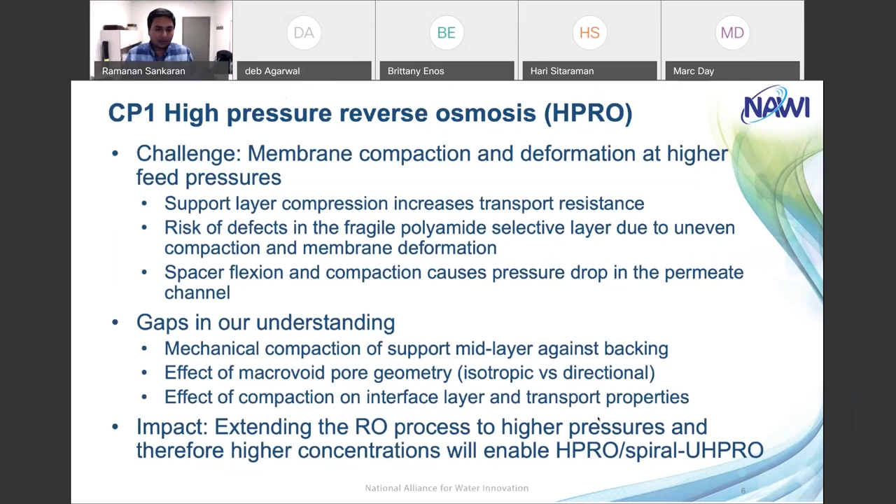Thanks, Ramanan. Let me also acknowledge the team members and contributors to this task, and the challenge problem advisor. For the HPRO challenge problem, the major challenge is to address membrane compaction and deformation at high feed pressures. This can cause the support layer compression and increase transport resistance. It could increase the risk of defect formation due to uneven compaction and may also lead to pressure drop in the permeate channel. The gaps in our understanding are how to model the mechanical compaction of the support layer against the backing, how the macrovoid pore geometry affects membrane properties, and how compaction affects the transport properties of the membrane. Addressing these challenges would enable us to extend RO process capabilities to even higher pressures and higher concentrations.

As part of this task, we developed the following numerical modeling workflow, with two key links. The first is the representation or reconstruction of the pore scale geometries, which could either come from reconstructed experimental images, or could be synthetic or canonical pore geometries.

These geometries can be exported to several physics simulation codes, some of which Ramanan introduced earlier. We can be looking at the compaction to mechanics models or pore scale transport simulations to characterize these membranes. Now, this workflow will enable us to gain more fundamental insights into the performance of the membranes, as well as

develop better informed models that can be used for channel scale CFD and analysis. In today's talk, I'll focus on synthetic pore geometries as well as the pore scale transport simulations. And towards the end, we can come back and talk about the other key links here, depending on the interest.

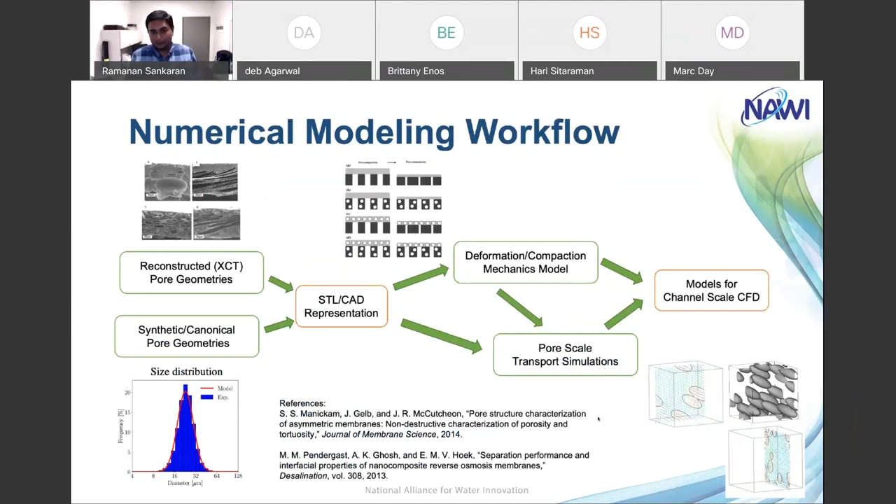So the synthetic geometries are basically statistical representations of the pore scale structures. The Proteus HF workflow synthesizes these geometries that can be easily interactively visualized and compared against experimental images. These geometries are constructed within the code Quilt, and they can be exported in several different formats.

It leverages several open source capabilities as part of this HF workflow. Now, if you look at the first branch, these geometries are pretty lightweight, so they can be very useful for interactive visualization and collaboration with team members, and also for sharing with experimental researchers, so that we can easily and quickly identify some interesting geometrical features of the pore scale, and maybe also iterate on those geometries to construct a

larger database. Now, these geometries are of course also fed to the physics simulation codes, such as the MPM code for compaction and Quilt for transport simulation. And depending on their end use, these files can be larger in size and can leverage the high performance computing platforms.

So let me quickly go through some of the example geometries, parameterized synthetic geometries that can be constructed. Starting from the top left, we are looking at a multi-layer isotropic structure. Basically, this is a structure that has uniform spherical pores randomly distributed within a layer, and then multiple layers being stacked on top of each other.

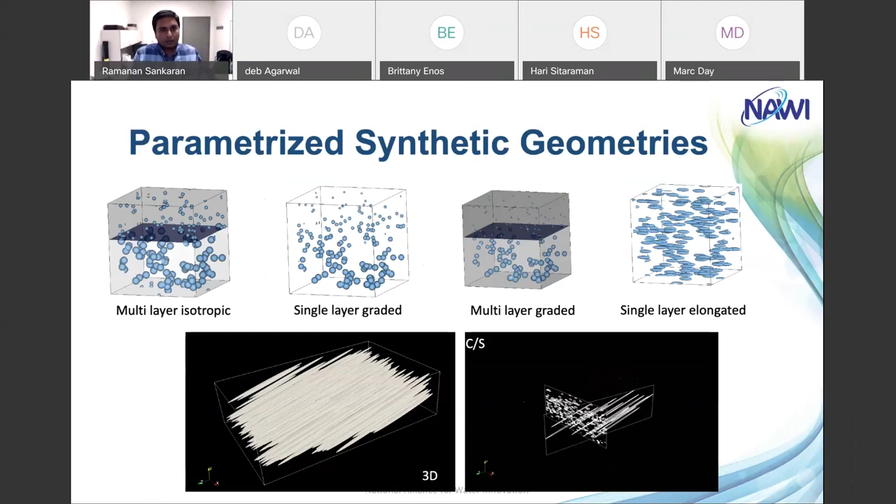So moving on to the transport simulations, these are performed using the code Quilt, which, as Ramanan said, is being developed here at Oak Ridge. It's an interface resolved flow solver. In the recent past, we have looked at several different applications. A couple of them I have highlighted here.

On the left, we are looking at a multi-phase flow application where we studied a molten media reactor that's typically used for converting natural gas into carbon and hydrogen. And that is a really promising route because it does not involve production of CO2.

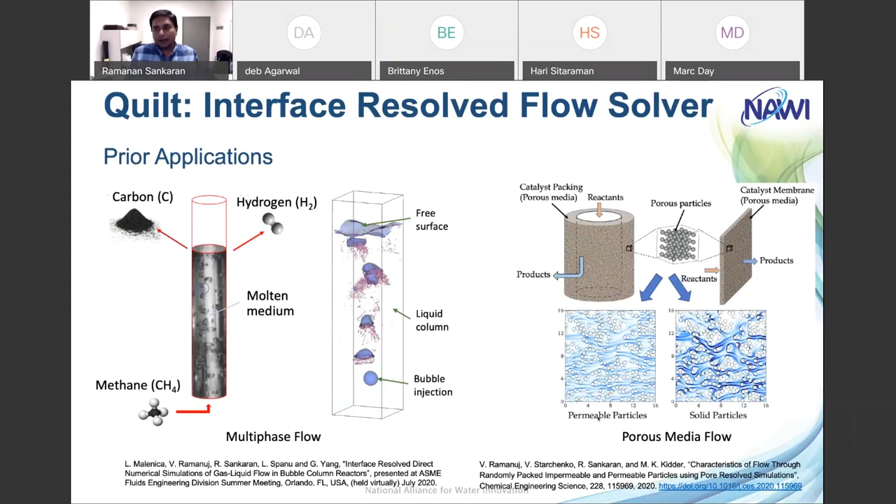On the right-hand side is a porous media application where we studied flow through catalytic porous packings. In this case, we are interested in looking at the effects of polymer particle porosity and how it affects the overall flow and chemical conversion rates in these applications.

At the heart of this code Quilt is what is called an implicit interface representation capability. This is done using a level set method. Just a quick overview of the level set: it is a signed distance function within a domain, and it's used to capture implicit interfaces embedded on structured meshes.

So naturally, following the definition of level set, we can easily understand that the zero level set contour will capture the interface. And being a distance function, it is also used to capture several geometric features like the orientation and curvature of the embedded interfaces.

In the code, we have capabilities to represent dynamic as well as static interfaces. Since this particular problem relates to static membrane structures, I'll skip the introduction about the dynamic interfaces, but I can come back and talk about it later if there is interest.

For this particular application, we chose the level set method specifically for two reasons. The first is that it gives a capability to model the pore deformations resulting from membrane compaction, and that could be from analytical or geometric transformations, or we could impose a deformation field that would result from mechanics calculations, for example, using an MPM code.

If you look at one of the experimental images I showed before, the membrane structures usually have two-scale porosity. They consist of large-size voids, called macrovoids, and the remainder of the membrane domain is made up of

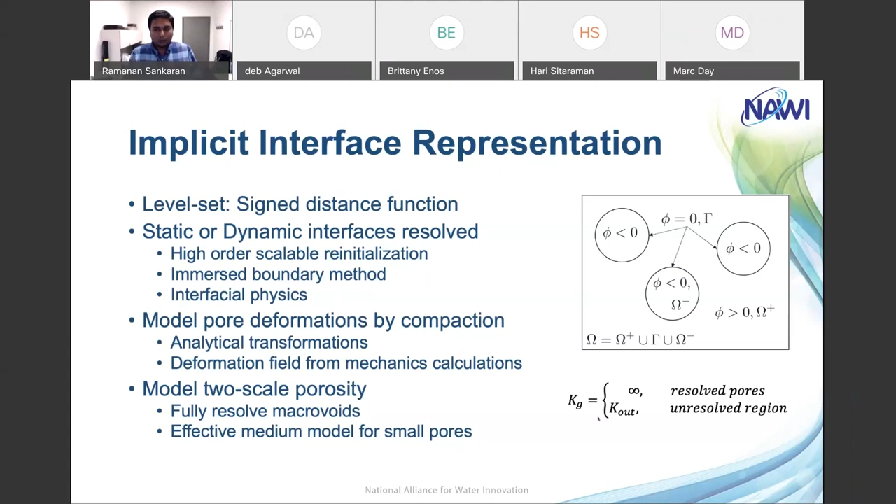homogeneously distributed small pores. So with the level set framework, we can address the two-scale porosity of the membrane by fully resolving the macrovoids using the level set function, and the rest of the domain is represented using an effective medium model to address the transport through smaller pores.

Now, in this case, we are interested in looking at membrane characteristics quantitatively. In particular, we look at the tortuosity, hydraulic tortuosity, permeability, and structure factor of the membrane.

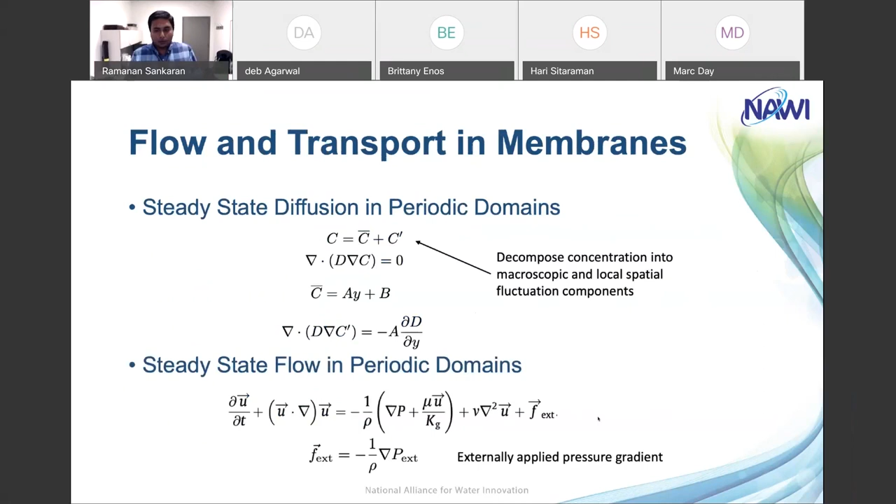To analyze these quantities, we seek a steady state solution for the diffusion and flow transport in periodic domains. The flow in this case is governed by an externally applied pressure gradient.

Now, going back to the synthetic membrane structure I showed before, our aim for this preliminary study was to first identify an experimental work that we can leverage to verify our numerical simulation results, as well as use these results to identify certain key parameters in the geometry or in the physics that we can explore later.

So in the following slides, I'm going to show the calculation of membrane characteristics like tortuosity, hydraulic tortuosity, permeability, and structure factor based on a particular synthetic geometry that we have initialized following some experimental studies.

Here is the work that was published a few years back by Manickam and others. This was actually a multi-layer membrane support structure, and we specifically identified one of the layers to create our synthetic geometry.

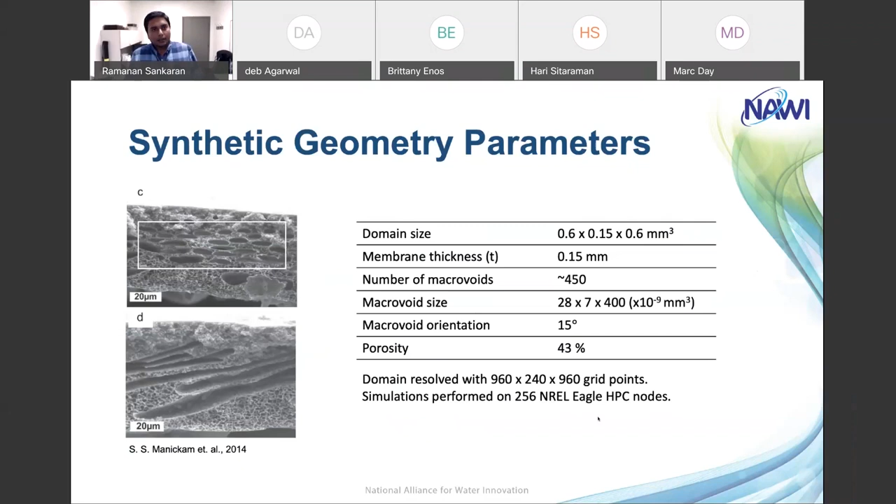So let me come to the diffusion transport first. Here we performed two specific numerical experiments. In the first case, we apply far field Dirichlet boundary conditions above and below the membrane.

Based on the ratio of concentration gradient at the surface of the membrane, we can compute the effective diffusivity of the membrane structure. In the second experiment, we actually solved the steady state diffusion equation on a triply periodic domain,

just like following the equations I showed a couple of slides before. On this right-hand side image, what we are seeing are the flux vectors, which, if you look closely, actually represent tortuous diffusion flow paths that result from the arrangement of these macrovoids.

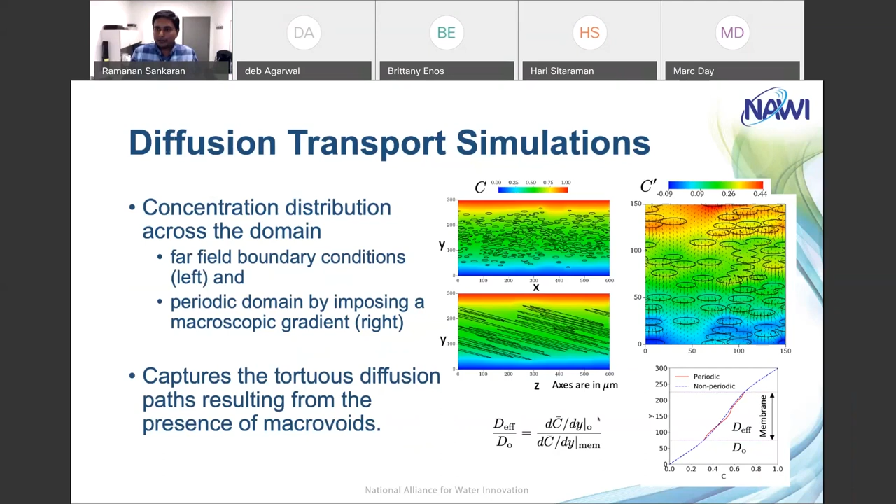Now, to quantitatively represent this effect, we calculate diffusional tortuosity by two different methods.

And in most membrane literature, structure factor is also an important quantity used to characterize the membranes. The structure factor in this case is defined as the ratio of porosity to tortuosity of the membrane.

Now, we compared the numerical simulation results with what was published in the experimental paper I just referred to before. We observed a pretty good agreement between the simulation results and the experimental work.

Although there are a couple of key points to be noted here. The experiments were performed using destructive testing and 3D image analysis, and these were performed for composite membrane structures.

So those were multi-layer support structures, and then those were imaged to obtain the characteristics.

The geometric characteristics, the geometric feature parameters I showed a couple of slides before, correspond to the bottom support layer, which is where these characteristics are computed.

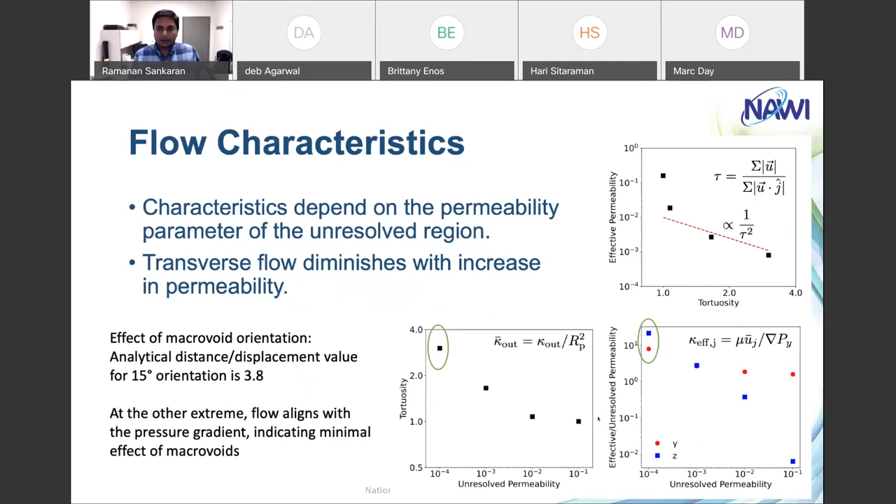And we can further explore the performance of these support layers by creating several iterations of the synthetic geometries.

Motivated by these preliminary results, our next steps include studying the HPRO compaction using synthetic geometries, which can be done in two different ways. We can either impose an analytical or geometric transformation model that will alter the level set function and change the shape of the macrovoids, or we could import the displacement fields obtained through mechanics calculations using the material point method that was initially introduced in one of the codes.

We can also model the flow through these statically compacted media and look at its effects on the overall transport properties of the membrane structures. Since we have the capability to generate several synthetic geometries, this also enables us to analyze several of these membrane structures and explore the various pore structure characteristics of these membranes.

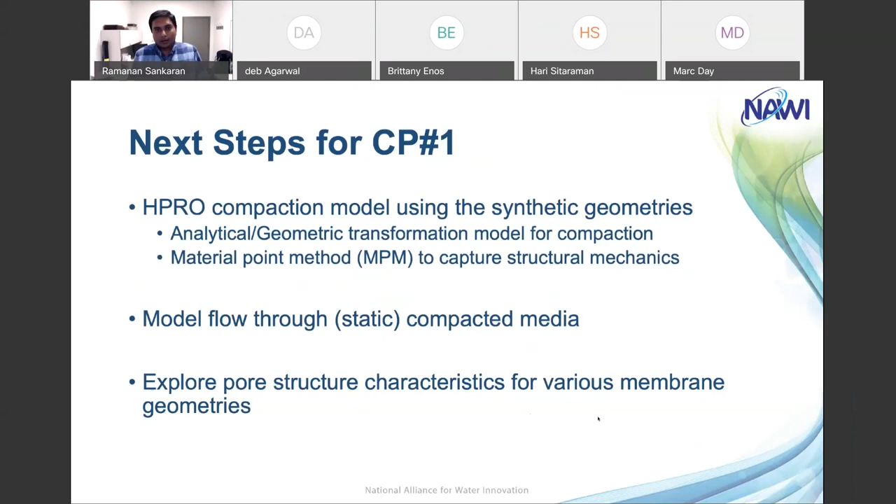So with that, I'd like to transition to Hari, who will talk about the second challenge problem here.

Hari, can you hear? Yeah. Okay, thank you everyone for joining.

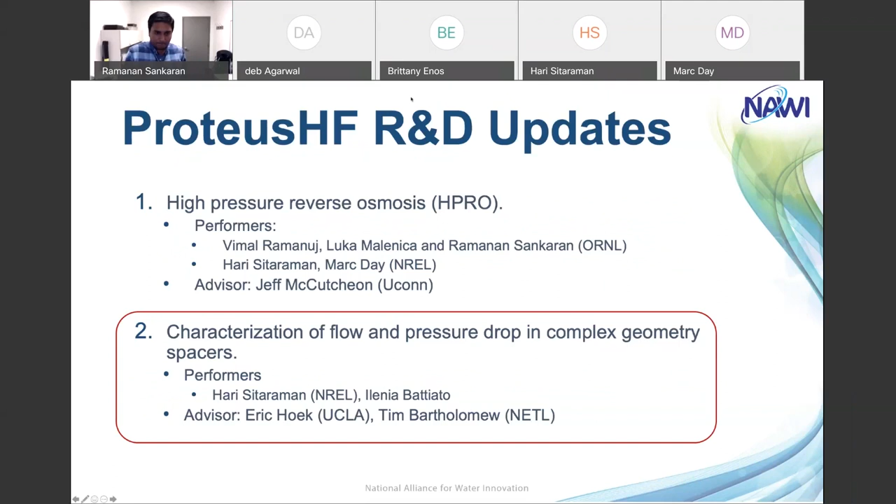Now we would like to transition to the second part of this talk, which is basically on characterizing flow and pressure drop in complex geometries, spacer membrane geometries. Can you move to the next slide?

Our aim really is to have a generic solver that can aid in providing models for higher level systems models like ProteusLib. As part of this effort, we have developed a solver using OpenFOAM, which is initially built on SUMS, Stanford's membrane solver. We have added features where we include variable properties—viscosity and density—and osmotic pressure as a function of concentration. I would like to thank Professor Eric Hoek and Tim for providing us with some of these correlations.

We also include bulk transport of solutes and variable properties. The implementation of the boundary conditions is what is important here. We have a permeate velocity at the membrane, which is a function of the membrane resistance and viscosity, and also depends on the difference between the transmembrane pressure and the transmembrane osmotic pressure. The osmotic pressure is again a function of the concentration and a salt rejection factor.

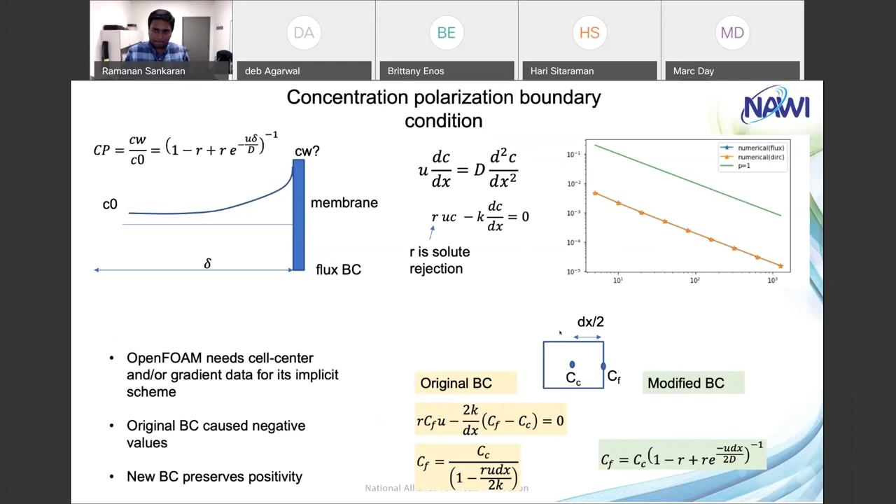So we have verified our solver against several published results. The first one we did was to see if we were able to match pressure drops for a channel with very small thickness and porous walls. What is shown on the left-hand side is pressure drop against distance along a channel, about 2 meters long and 1 millimeter in thickness, and it compares well with the published perturbation theory solution by Berman et al.

In the 1953 paper. The next thing we studied was for a flat channel without spacers, 7.6 centimeters long, 1 millimeter thickness. We looked at the CP factor variation along the length of the channel and compared this with papers from Professor Eric Hoek's group, Subramani et al., a paper from 2006. We were able to match the CP factor along the axis for several cases where we varied the permeate velocities through the membrane.

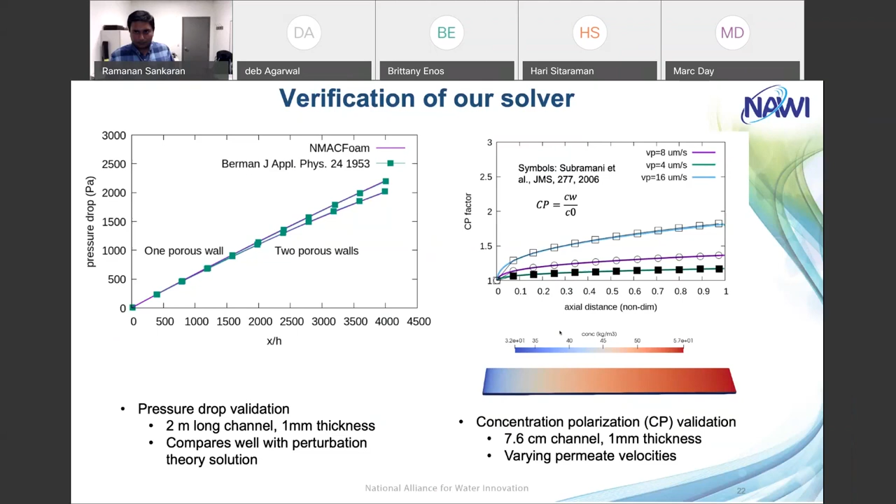As I mentioned earlier, really the aim of this facet of high fidelity modeling is to get mass transfer correlations that can be applied at the systems level.

So one of the first things we did was to see if our model was able to obtain the published correlations that I think is being used in ProteusLib, which is the Reynolds power 0.36 correlation for the Sherwood number. I have replicated that case here from the Guillen and Hoek et al. paper in 2009. It's basically a case with a rectangular membrane with cylindrical spacers.

The correlation is again found based on the equation for CP as shown here, where I find the CP from the simulations, which is the concentration polarization factor, and then compute the mass transfer coefficient from this equation and apply it to the Sherwood number equation as shown here, where K is the mass transfer coefficient, DH is the hydraulic diameter, and capital D is the diffusion coefficient for the solute. With that, we were able to match what Guillen and Hoek had obtained in 2009 for the Sherwood correlation, as shown in the plot on the right-hand side.

One thing we really observed was that this correlation is very sensitive to the grid resolutions. This is mainly because the Peclet number for the solute equation is on the order of 30,000, while the Reynolds number is actually small. So therefore, to resolve the concentration boundary layer, you would need enough number of cells within the flow channel to obtain grid independent results.

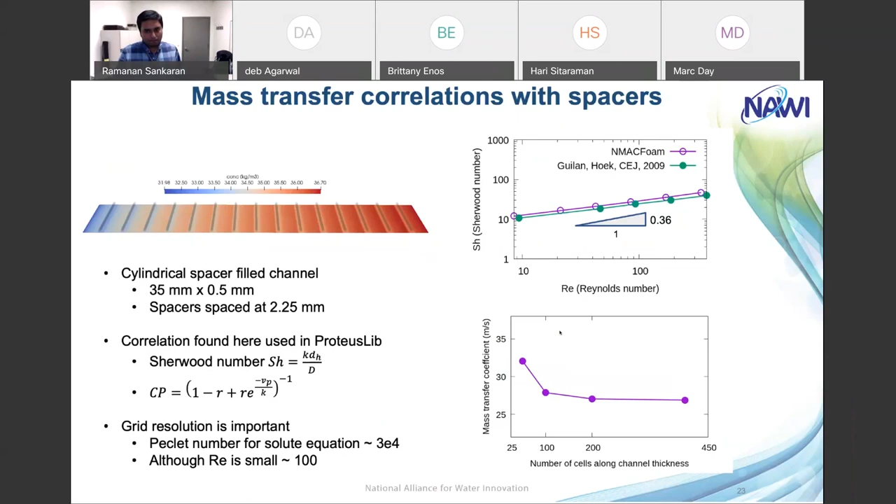With all these verifications done, we moved on to doing some large scale cases. What I'm showing here is a case where we ran a 1 meter long axisymmetric membrane with a diameter of 8 centimeters and a thickness of 0.5 millimeters. You can imagine this like a 1 meter long newspaper folded into a toroidal cylindrical domain with a very small thickness, representative of what RO modules have as membrane spacer configurations.

What I'm showing here is a case where we have flow at about 0.8 meters per second. I've also shown a zoomed in view of the vorticity field, and you can see that at this Reynolds number, the spacers are releasing vortical structures behind them. The train of vortical structures is what is shown here.

If you look closely, I'm not sure if it's showing up in the WebEx video, but this is actually a movie where you can see tiny variations in concentration along the large scale cylindrical configuration. These were done on NREL HPC, run using 1024 processors, requiring 2 days of wall clock time, with about 24.5 million cells in the simulation.

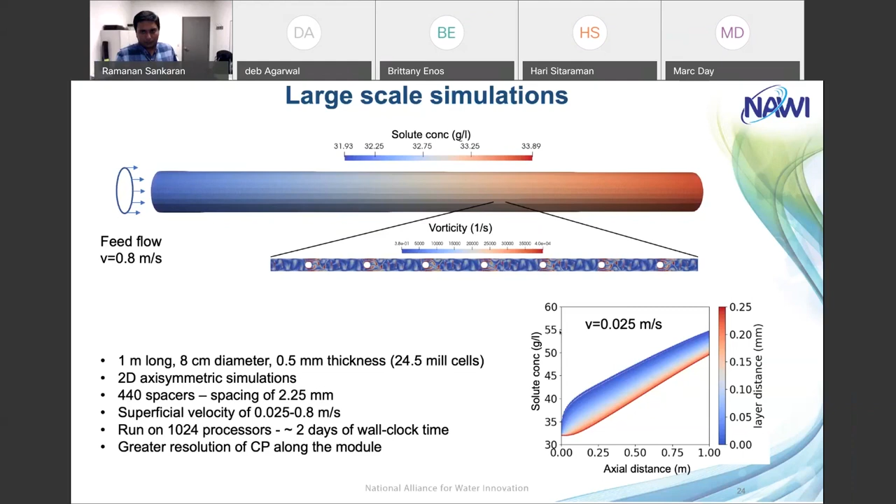Okay, next slide. So finally, we come to the main aim of this work, which is the mass transfer correlations at module scale.

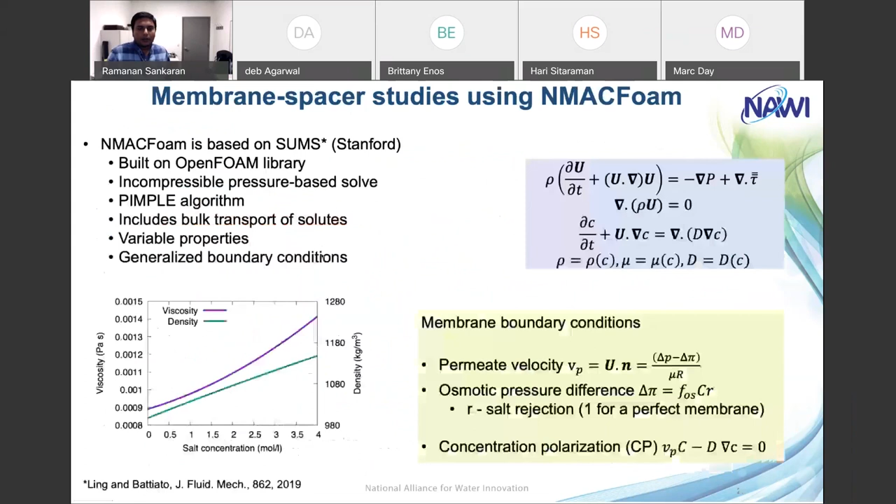So let me go back. A couple of things I'd like to point out. In these cases, if you look at some of the correlations typically used for porous media, like the Karman-Kozeny correlations, they do not consider the geometric parameters as one of the input factors.

Most of them only take the pore sizes, the equivalent pore sizes, as input to determine the effective permeability of these structures. But specifically in these membranes, macrovoids exist as a result of the manufacturing process, and they're inherent in these membranes, significantly affecting our estimates of membrane permeabilities and characteristics overall. So that was one of the important findings and verifications we were able to do with this study - trying to bring in more of the geometric parameters of these macrovoids or membrane microstructures into calculating or estimating the membrane characteristics.

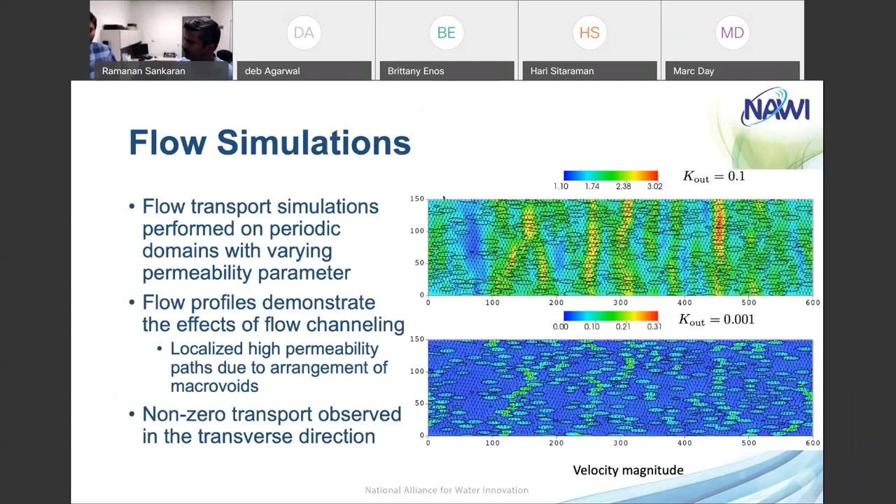Was it the 3-4 challenge problems? There are 2 challenge problems that we actually referred to. There are 2 other challenge problems that we identified, but we have not started working on those yet - those are still planned work. And those challenge problems, the last 2, number 3 and 4, would be to inform better models in the process-level model in Proteus Lib.

But between 1 and 2, we haven't come up with a prioritization or anything. But as of now, these 2 challenge problems are the focus, and that prioritization of those 2 was chosen through discussions with the various elements of the NAWI program, to find challenges that would be most helpful to resolve questions within the projects or the development of some of the tools.

So thanks for those questions. We still have time for a few more questions if there are more questions.

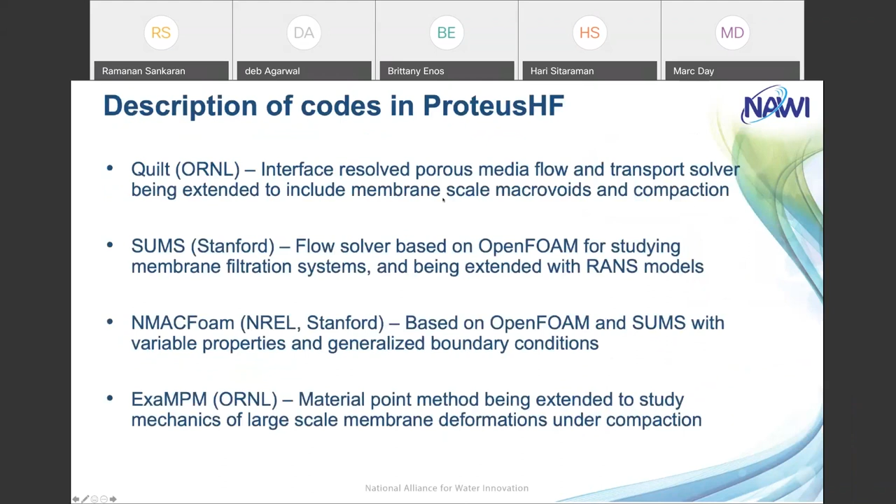I think the fact that the correlations were different was an important conclusion we obtained from our simulations at the large scale. Initially, many of us had a feeling that high fidelity simulations may not be useful at all. But now that we have done this, we are able to say that high fidelity simulations are important to identify those correlations. I think that's surprising and useful in some sense.

Thanks. So Tim Bartholomew, our collaborator, has a question. It's interesting to see how fully developed flow could be a bad assumption, which is what Proteus Lib does. To improve Proteus Lib, you guys suggested surrogate models rather than simple correlations. These surrogate models would be only applicable for a fixed membrane module size, correct?

Yeah, so again, I wasn't very clear on what I meant by surrogate models. It could be a set of surrogate models that includes one that is basically the Sherwood correlation that Tim, you may be using directly in Proteus Lib, or it could be a surrogate model given a full-size membrane with so many spacers, so it could include several parameters together to get to a surrogate model. But I think at least to get started, the Sherwood correlation is what I really meant as a surrogate model.

I wish I could hear you.

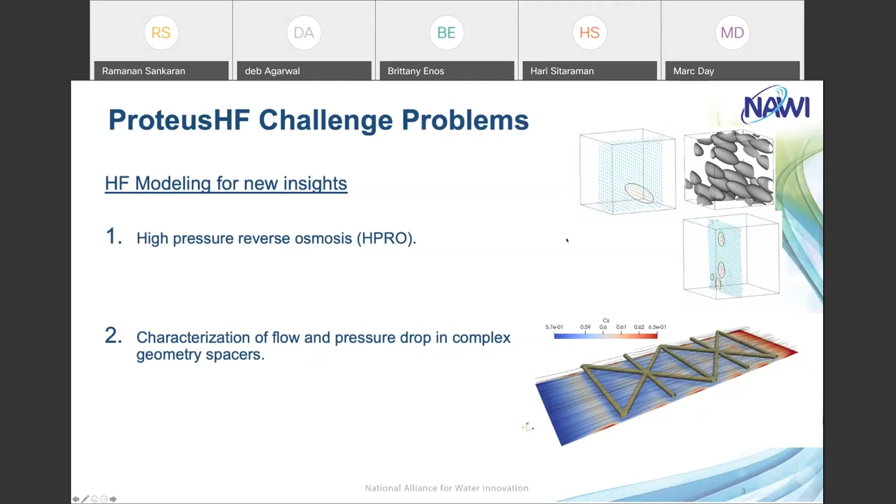But if you go to your results slide, it was hard to see a relationship that we could fit to those things, right? I forget which slide number it was, but it was like each case was different, right? Yeah, you're right. That is why the plot of Sherwood versus Reynolds is not accurate. You would have to plot it in a 3 or 4 dimensional space to really see what is happening.

Okay, so you're saying weak function of Reynolds number, and that there's other things we need to consider. So would other dimensions like the porosity or just the velocity and other things like that make a better surrogate model?

That could be, but my real instinct here is that there is another factor, which is basically the distance along the membrane that goes along. Like there is an X by L, where X is the distance along the membrane and L is the length of the membrane. That would give that factor to the correlation that relates to how well developed the flow is at that position.

Is that possible in Proteus Lib? Do you have that? Yep, that's perfectly fine. Most Sherwood number correlations have that X by L, which you're probably familiar with. Okay, yeah, as long as we have a Sherwood number correlation from this work, then it can be applied into Proteus Lib. And we have positional data in our 1D model, so if that changes by X, that's okay for us.

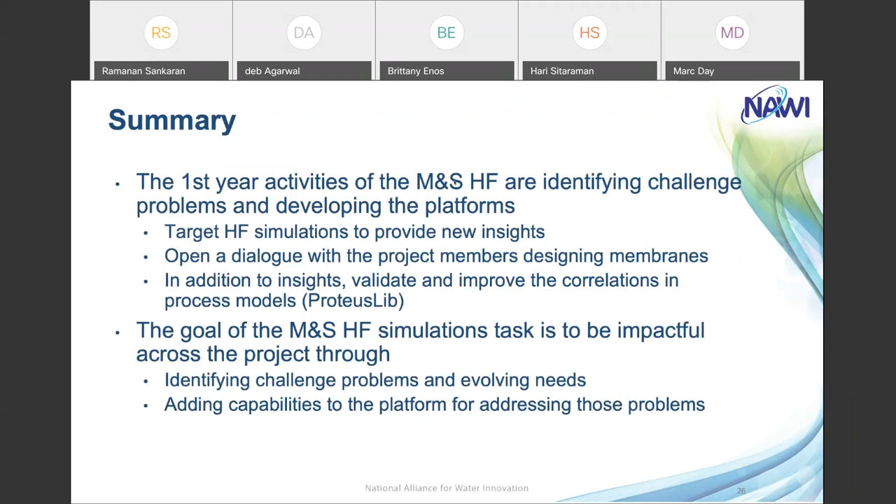I'm not sure I understand how or why your Sherwood number is changing with Reynolds number the way it is, these vertical sort of lines of different colors.

Yeah, so I can answer that question. The Sherwood number is basically a measure of the mass transfer coefficient, which is the diffusion coefficient divided by the concentration boundary layer thickness. If the flow is not fully developed, the boundary layer thickness is changing along the axis, while the Reynolds number has stabilized because it is quite small. So for a given Reynolds number, I would see a range of Sherwood numbers because the boundary layer thickness has not stabilized. That's why you see these vertical streaks. I hope that makes sense.

How are you determining the boundary layer thickness? It is from the film theory equation. I compute the concentration polarization from the simulation, and then use the film theory equation to get the mass transfer coefficient.

So from your CP modulus, you're back calculating the mass transfer coefficient. That is correct. And then from there, D by delta is your mass transfer coefficient, basically.

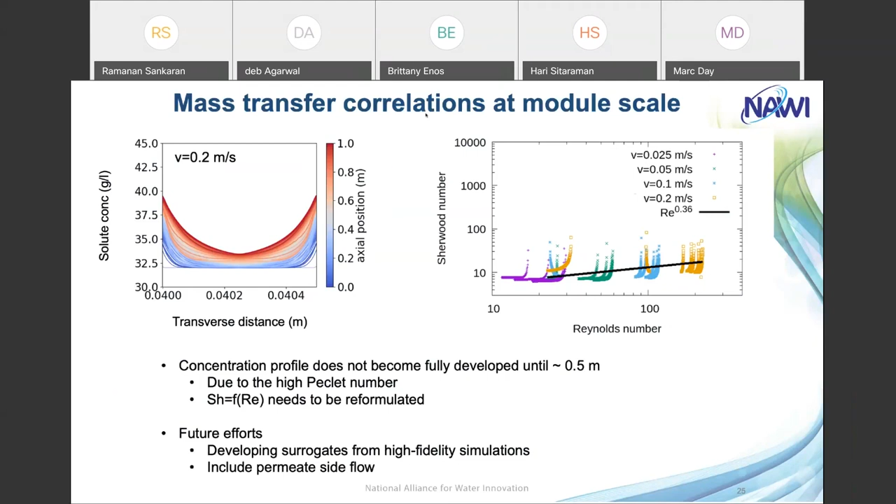Yes, exactly. Okay, can you go to your plot of CP along the length? What you're showing here is the concentration increasing by a factor of, I don't know, 1.6 or 1.7, almost 2x. Yes, from inlet to outlet.

But what's not clear to me is, when we calculate CP, we calculate the local concentration near the surface of the membrane divided by some value. What is the value you're using to normalize that? I'm using the value at the middle of the membrane to get CP. So the center line, yeah, the local concentration. Isn't that what you use as well?

Well, yes, but it doesn't look like that's what you're normalizing by. It looks like you're normalizing by the inlet concentration. No, in this case, I'm actually plotting the actual solute concentration, so it is not normalized at all.